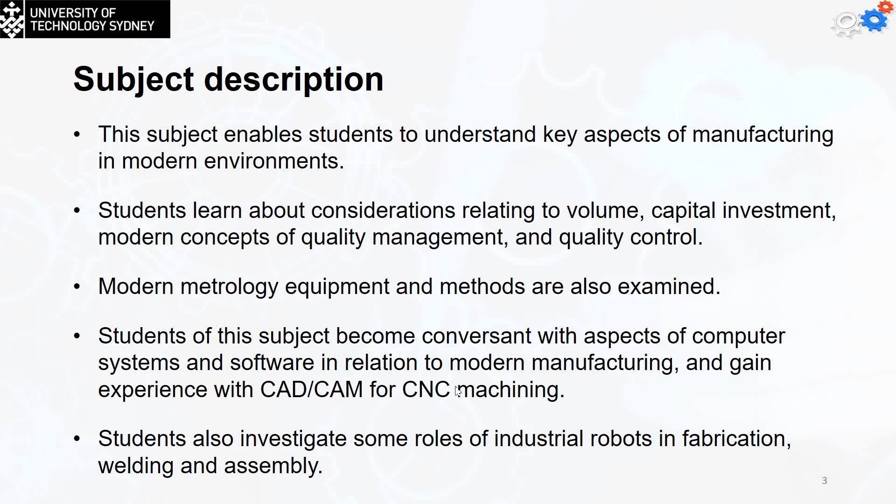So the plan for this subject this semester starts with week 0. Since it's an introduction session, we don't have any real class, and it starts on the 2nd of March. We started 2 days ago with an online introductory video covering production systems, automation in production systems, and automation principles and strategies.

Starting from week 1, we'll talk about CNC, which stands for numerical control, the numerical control process of machine tools, and computer-aided manufacturing systems, known as CAM. We'll also discuss open and closed loop control, and the sensors and actuators used in numerical control systems.

In week 2, we'll continue talking about CNC and CAM - computer numerical control and computer-aided manufacturing systems. We'll discuss ball screws, encoders, analysis of CNC positioning systems, and we'll learn about G-coding.

For G-coding, I'm going to send a separate video from the lecture where you'll learn the principles of G-coding and how to write G-code manually, because this will be part of your assessment number 1.

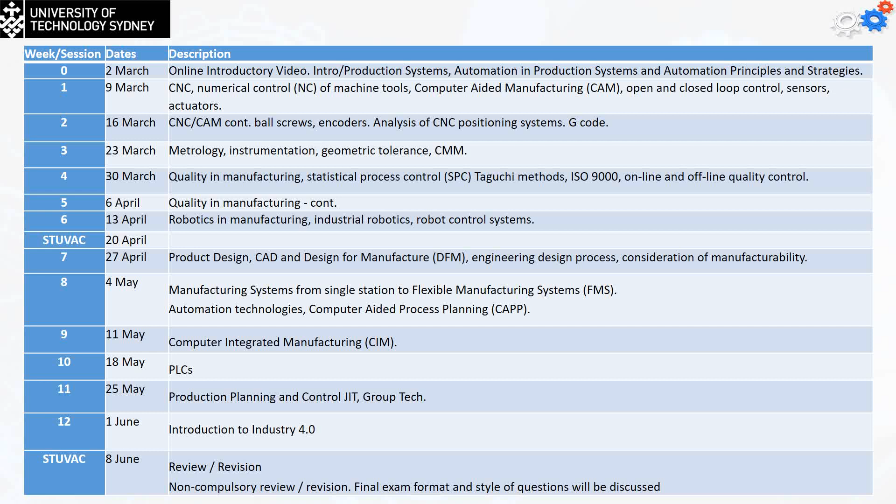On the STUVAC of the 8th of June, we'll have a review revision lecture, which will be non-compulsory attendance for students. But the revision will actually cover the final exam format and the style of questions we'll have. I can tell you that students who attend this revision lecture usually get very high marks in the final exam.

Now let's have an introduction about advanced manufacturing. It's something similar to the manufacturing we had, but we're going to talk about more advanced issues. I'm not going to cover advanced manufacturing processes, but I'm going to talk about advanced manufacturing styles and applications.

So you can see that we're going to cover things like management, how to make a model and then manufacture it. It's something more advanced than the manufacturing processes themselves - we're talking about the application rather than the technologies.

So the section we're going to cover for the day is going to be about the manufacturing production systems. Also, we're going to talk about the automation and production systems. We're going to cover the manual labor in the production system role, and we're going to talk about the automation principles and strategies.

So what is the definition of the production system? Simply a collection of people, equipment, and the procedure organized to accomplish the manufacturing operation of a company.

So we learned some previously, for example, about the casting. We talked about machining. We talked about additive manufacturing and other stuff. We talked about in the machining, the milling, the drilling, and so on.

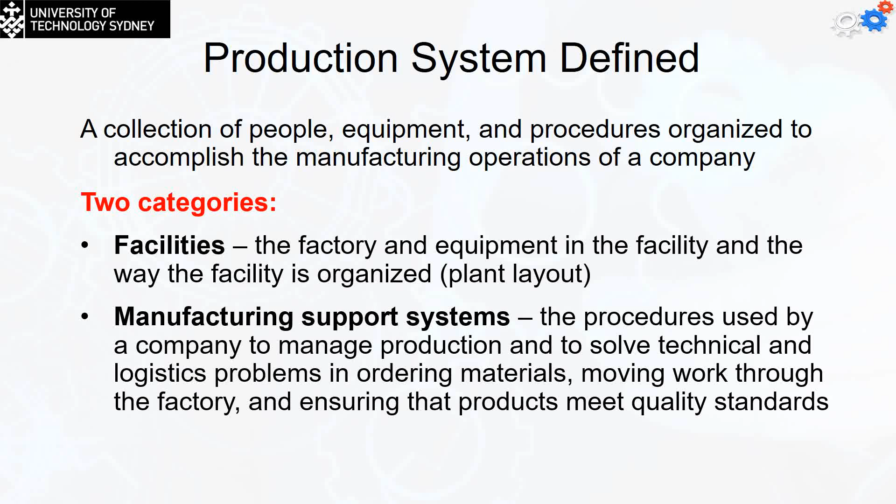So we can simply sketch that as a block diagram. As you can see here, the production system is going to be classified as facilities and manufacturing support system. The facilities is everything regarding the manufacturing system, and the factory and the plant layout. For the manufacturing support system, it's going to be the process of the product design, the manufacturing planning, the manufacturing control, and the business functions.

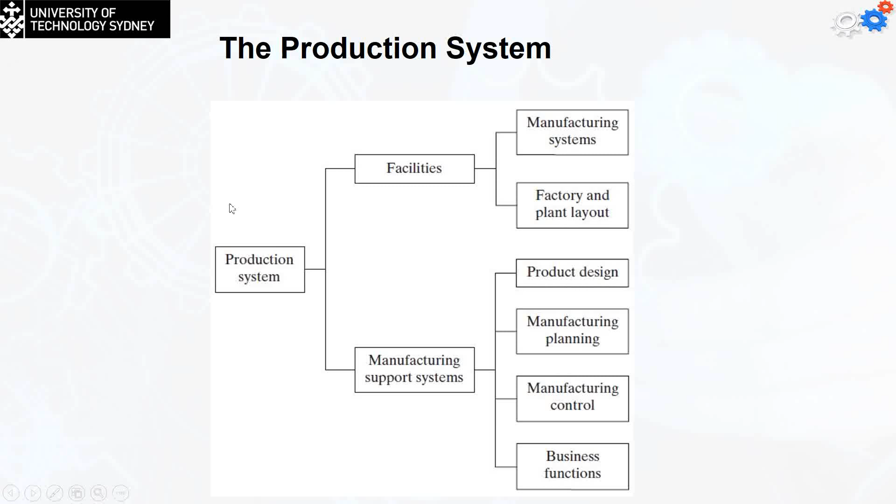The production system facilities are including the factory, the production machines, and the tooling. Of course, between the machines we need to have a material handling equipment. For the products, we are going to need an inspection equipment, and we need a computer system that controls the whole manufacturing operation.

The plant layout is the way that the equipment is going to be physically arranged in the factory. For example, we can make it as a full cell, where it's going to have the turning, milling, and drilling operations in the same cell, and the parts are going to move between these operations until we have the final part.

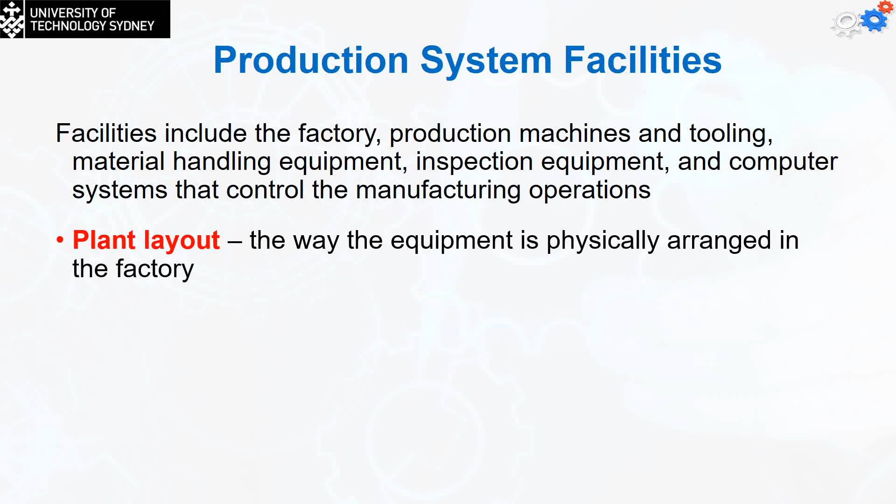Some places we are going to have it as a separate method, where instead of having a cell, we're going to have it in line, or we can have it as different departments, and the parts need to move between different departments until we finish the manufacturing process.

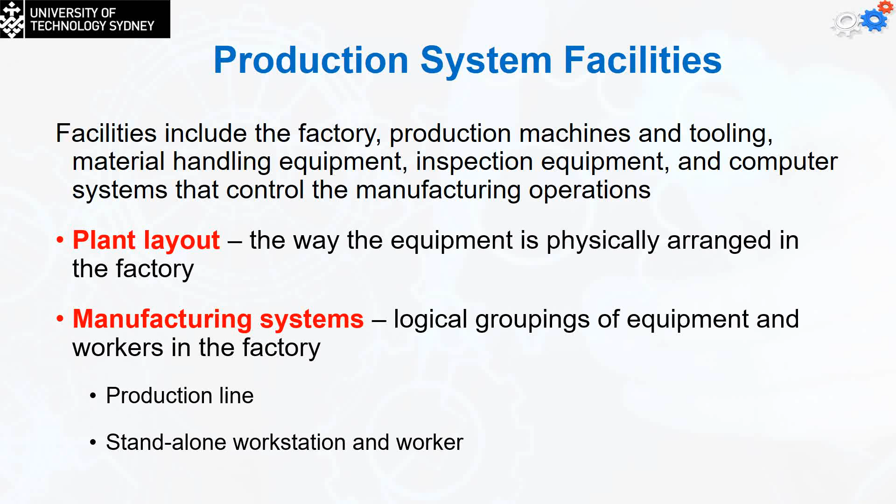The manufacturing system is a logical grouping of the equipments and the workers in the factory, which can be made as a production line or simply as standalone workstations and workers.

The manufacturing system has three categories in terms of the human participation in the process performed by the manufacturing systems. First is the manual work system, where we're going to have one worker who does all the work for one or more tasks without the aid of power tools, but sometimes he's going to use some hand tools. So just imagine there's a person working in an Apple factory who needs to assemble the mobile phone. Actually he doesn't have any power tools, but sometimes he's going to use hand tools like the screwdriver and other stuff.

The other type is going to be the worker and machine system, where the worker is going to be operating a powered equipment. It can be a drill, it can be a milling machine, or it can be a drilling machine, turning machine.

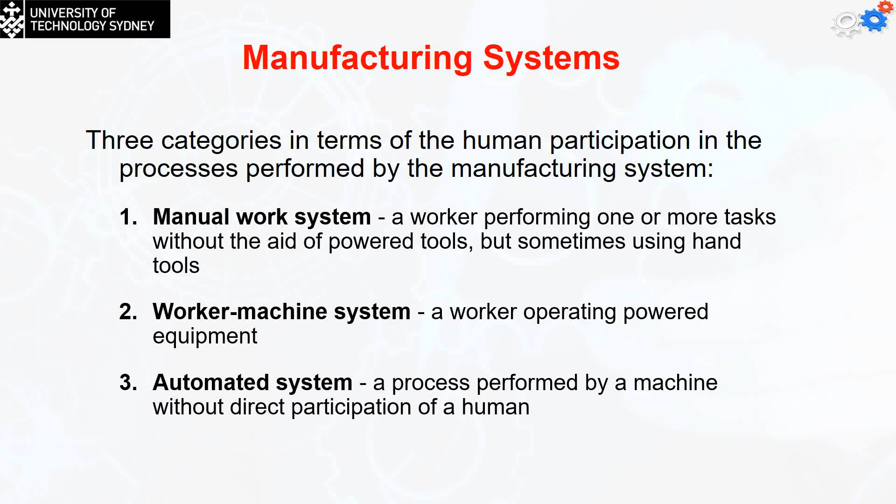The third manufacturing system we have is the automated system. The whole process is going to be performed by the machine without direct principal participation of the human, but we need a human to program this machine or to supervise the machine during the process. But he's not going to do the manufacturing process by hand like what we had in the worker and machine system.

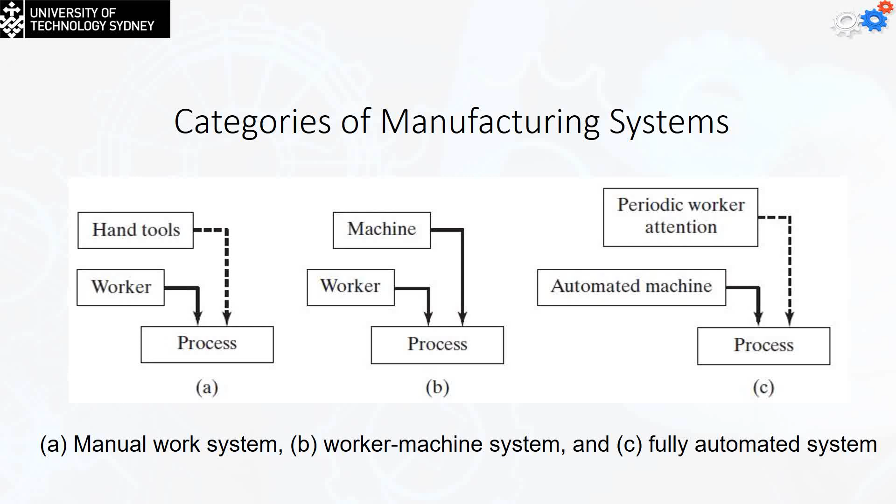The manufacturing support systems involve a sequence of activities consisting of four functions. The business function covers sales, marketing, order entry, cost accounting, and customer billing. This is what we call the white collar side.

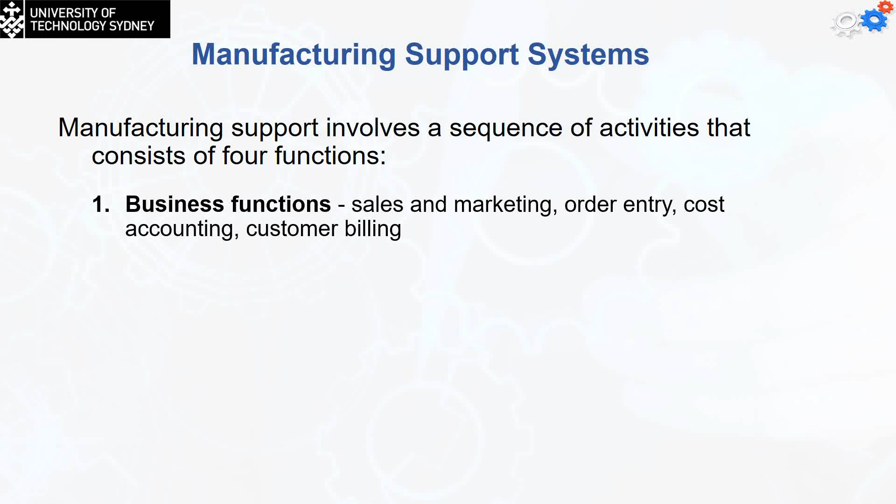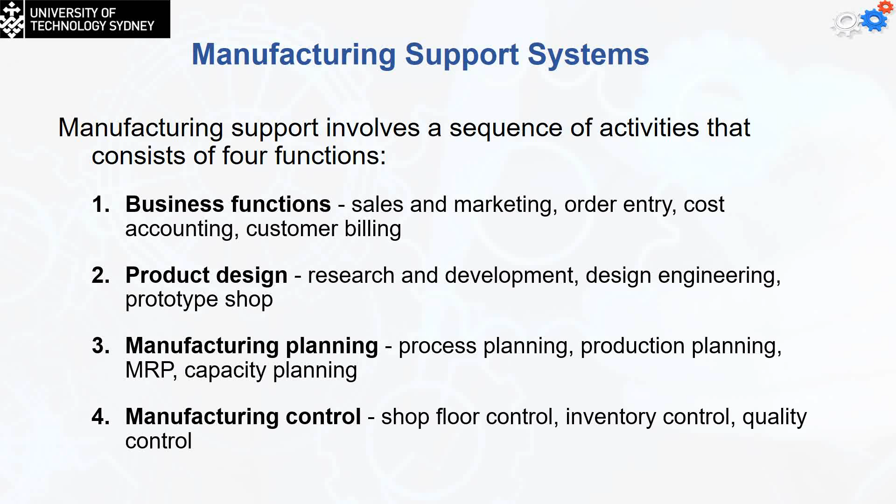Product design involves research and development, design engineering, and the prototype shop. Manufacturing planning is process planning, production planning, MRP, and capacity planning. Manufacturing control includes shop floor control, inventory control, and quality control.

Product design works within the budget of the vendors and the client, and then we start the manufacturing planning process. We send the data to the manufacturing control system, and this is sent to factory operations, along with the starting material which has been ordered by the business function before we start the manufacturing process.

Why does manufacturing control always have feedback from factory operations? That's because we need continuous quality control for the produced part and to align the process to match the designed product. Then we produce the products for the customer.

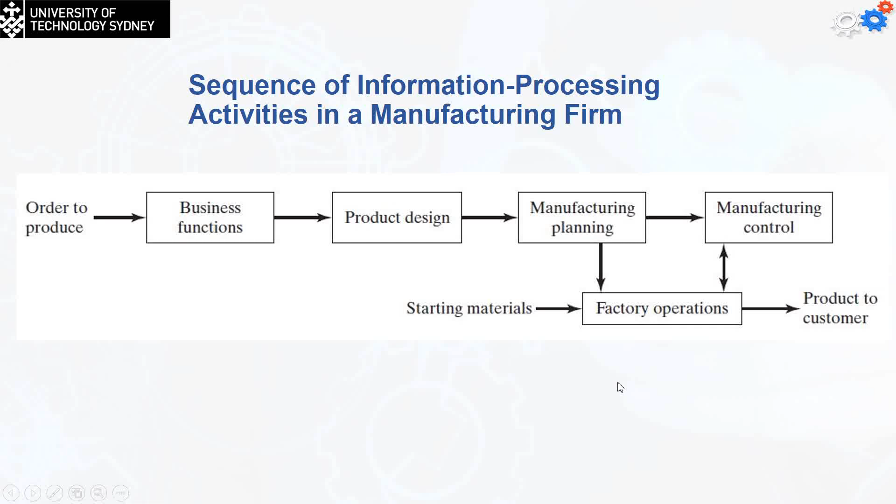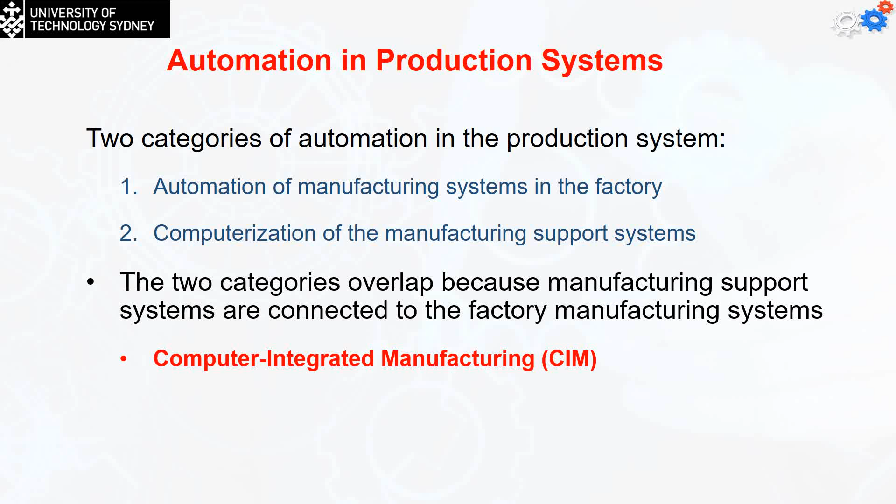Now, what is the role of automation in production systems? We have two categories of automation in production systems: first, the automation of manufacturing systems in the factory, and second, the computerization of manufacturing support systems. These two categories usually overlap, because the manufacturing support systems are connected to the factory manufacturing systems, and this overlap is controlled by something called Computer Integrated Manufacturing, or CIM.

So the production system, once again, is extended to have automation which can control the facilities and manufacturing support systems through CIM techniques. Automation plays a role in controlling manufacturing systems, while computerization handles all the other aspects like the factory and plant layout, product design, manufacturing planning, manufacturing control, and the business function.

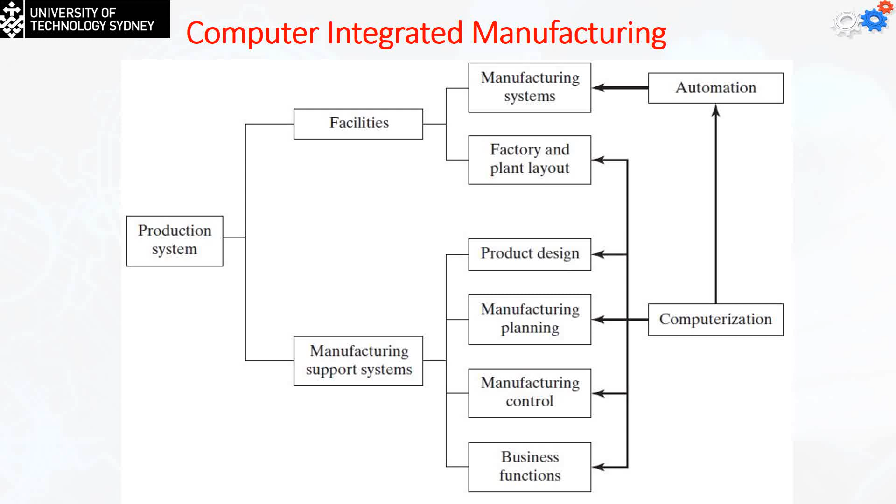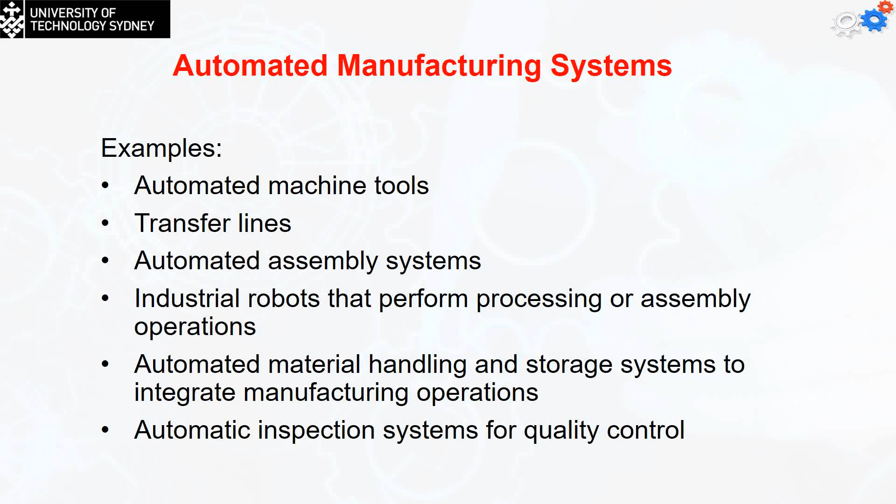Some examples of automated manufacturing systems are automated machine tools, transfer lines, automated assembly systems, and industrial robots that perform processing or assembly operations, as well as automated material handling and storage systems to integrate manufacturing operations. Lastly, we have automatic inspection systems for quality control.

Automated manufacturing systems have three basic types: fixed automation, programmable automation, and flexible automation. An example of fixed automation is a machine limited to making a certain type of product - it's almost fixed, and it's very hard to change the product type made on this process.

If we have a CNC machine, we can reprogram the product continuously - that's programmable automation. Flexible automation is more advanced, where we can simply change the product type being manufactured without needing setup time. This is achieved with more advanced computers containing multiple programs, allowing us to work alternately on different products without making a new setup - we can simply change the product type by changing the program only.

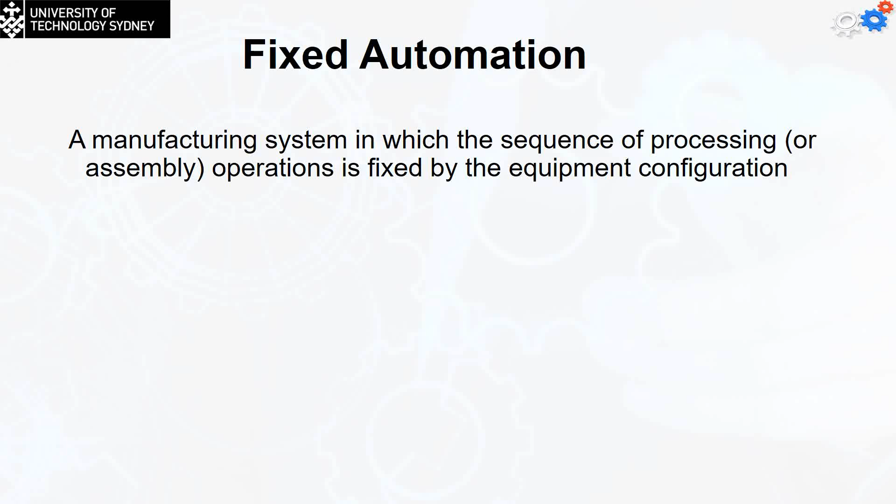Fixed automation is a manufacturing system in which the sequence of the processing or assembly operations is fixed by the equipment configuration. Typical features: it's suited for high production quantities, it has high initial investment for custom engineering equipment, it can have high production rates, and it's relatively inflexible in accommodating product variety.

So let's think about an example. I think I have an example on the other side... no, I don't have this one now. So actually, an example for the fixed automation system, just imagine that you have a machine.

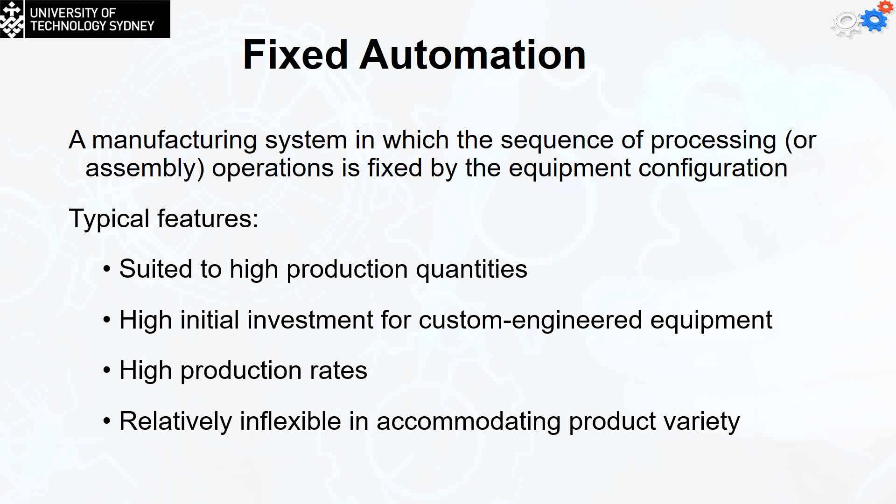Let's say it's plastic injection molding. The mold itself, we're spending something about $100,000 to make, and this mold cannot simply change the type of product it makes. The plastic melting machine itself can make multiple products, but this depends on the mold we add in the beginning. So we're investing a high cost on the mold, but it can only make one product. We cannot change the type of product we're going to make.

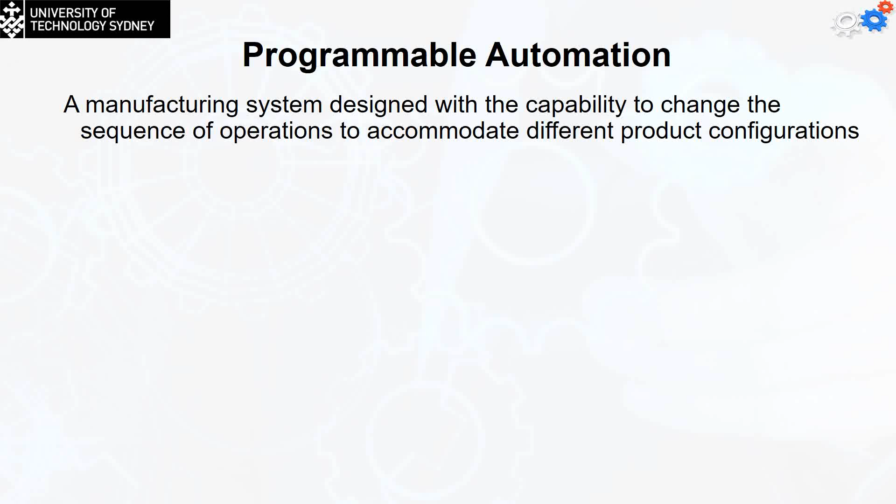Now, for programmable automation, it's a manufacturing system designed with the capability to change the sequence of operations to accommodate different product configurations.

The typical features for that: once again, high investment in general purpose equipment, simply because the technology is costly. Because we need to do the changing in products or the programming, this will have a lower production rate than fixed automation. The flexibility to deal with variation and change of production configuration is available.

It's most suitable for batch production. Batch production means you stop the whole factory, work for the whole week producing product number 1, then for the next week make a new setup and manufacture the next, let's say, 10,000 pieces for the next batch or product, and so on. The problem is the physical setup and the part programming must be changed between the jobs or batches.

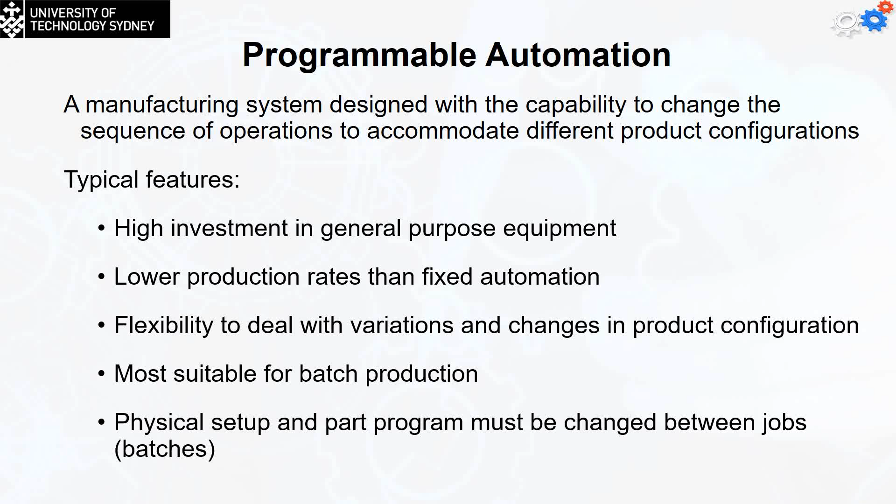Now, flexible automation is a mix between both. It's an extension of programmable automation in which the system is capable of changing over from one job to the next, but without losing any time between jobs. That means the fixture mainly is going to be mixed between the different products.

The typical features in this case: high investment for custom engineering systems, and continuous production of variable mixes of products. Now, just imagine what we mean by continuous production of variable mixes of products.

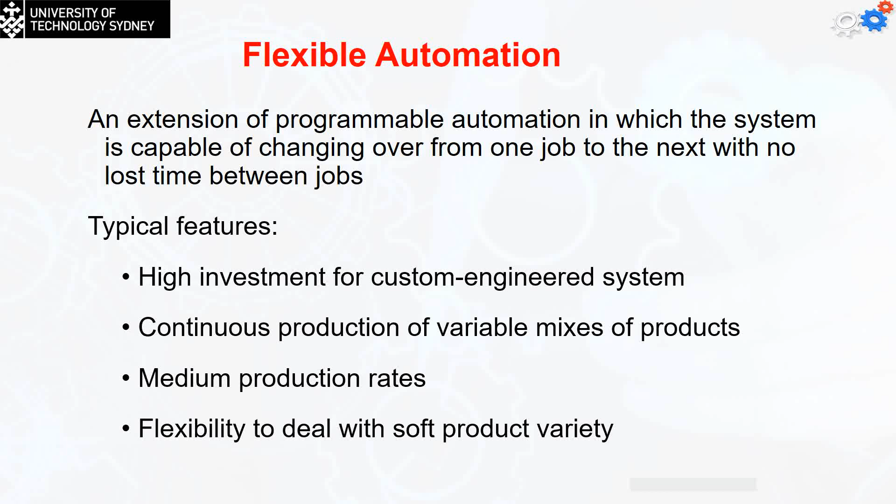So as a sketch, we can see that product variety increases with programmable automation, and production quantity is reduced with flexible automation, while in fixed automation we have the minimum production variety, because it's fixed to the initial investment of the mold we made, for example.

But because programmable automation has a waiting time when we change the program and the fixtures, it has lower production quantity, while flexible automation is in between, because there's no waiting time for changing fixtures, and the changing of the program takes only a matter of minutes. So it stands in the middle.

But for fixed automation, it's going to be in the range of more than 12,000 to 1.5 million - a massive production rate. Just imagine again the example of plastic injection molding: each time we fill the mold we can have 20 to 25 or even 50 parts manufactured within about 60 seconds.

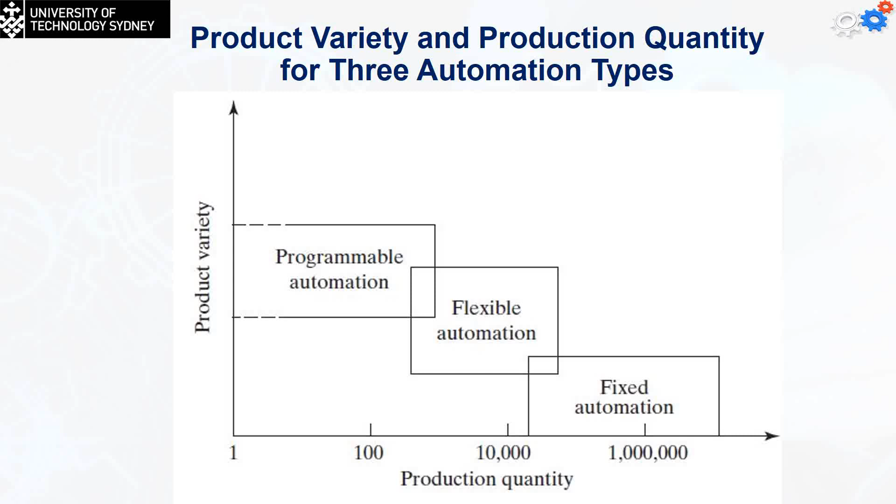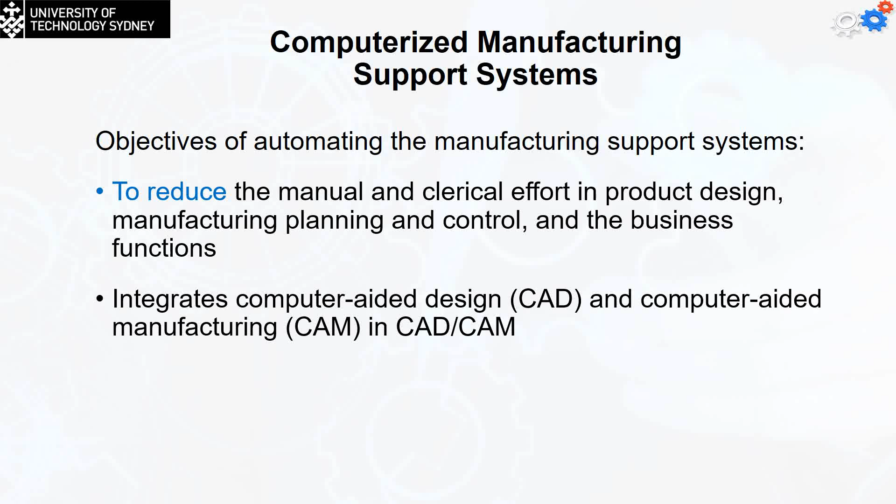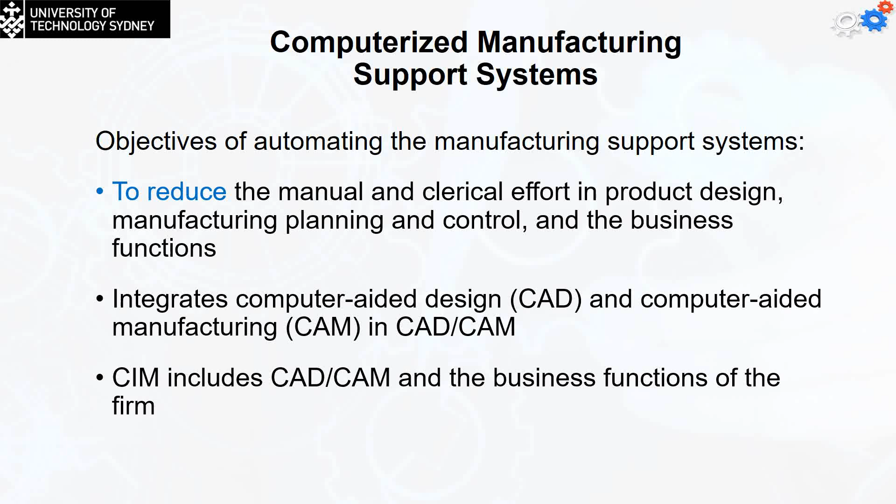For the computerized manufacturing support systems, the objectives of automating manufacturing support systems are: first, we need to reduce manual and clerical efforts in product design, reduce manufacturing planning and control, and reduce business functions. It will also integrate computer-aided design and computer-aided manufacturing, known as CAD/CAM. CIM will include both CAD/CAM and the business functions in the firm. So CIM, computer integrated manufacturing, mixes all manufacturing design and manufacturing with business functions in one big system. Now, why do we need automating?

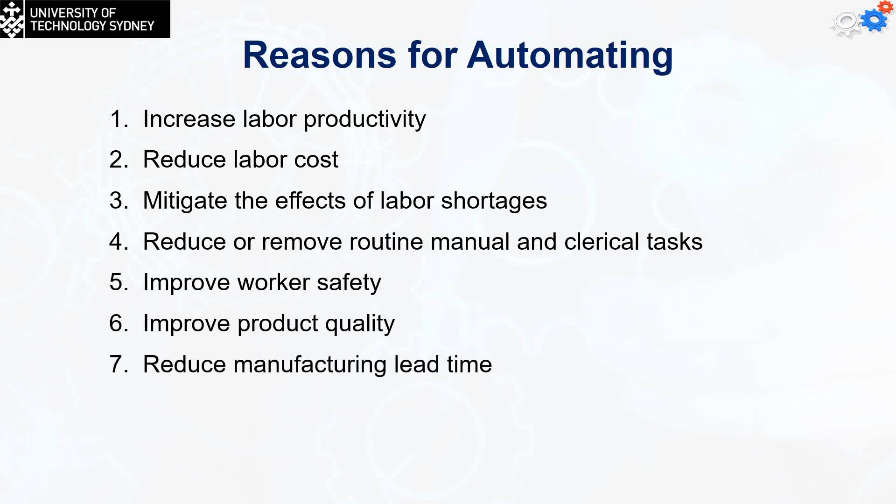First, we are going to increase labor productivity. Second, we are going to reduce labor cost. We are going to mitigate the effects of labor shortages. We are going to reduce or remove routine manual and clerical tasks. We are going to improve worker safety. We are going to improve product quality. We are going to reduce manufacturing lead time, accomplish what cannot be done manually, and avoid the high cost of not automating.

And we need to ask ourselves now, what will be the role of manual labor in the production system? Because we don't want full automated manufacturing that makes manual labor simply disappear. So first we need to understand the role of manual labor in the production system. Is there any place for manual labor in the modern production system? The answer is yes.

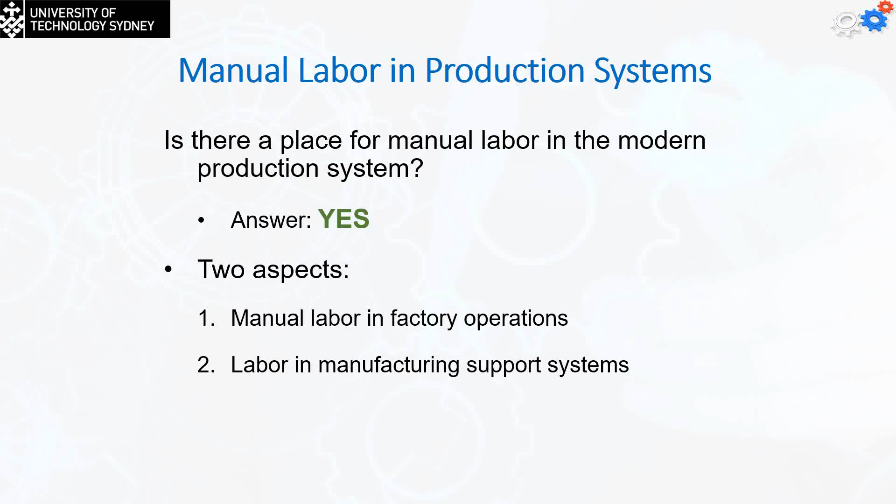So we are going to have two aspects for manual labor in advanced manufacturing systems: manual labor in factory operations, and manual labor in manufacturing support systems. So what will be the role of manual labor in factory operations? Usually, long term, the trend is toward greater use of automated manufacturing systems to substitute for manual labor.

So when is manual labor justified? Some countries have very low labor rates, and automation cannot be justified. Now you're thinking about that, right? Yep. So when we talk about most third world countries, for example, manufacturing of the clothes we're wearing or other stuff is usually transferred to these countries. I don't want to mention any names of countries, but that's what happens because of the low rates of manual labor.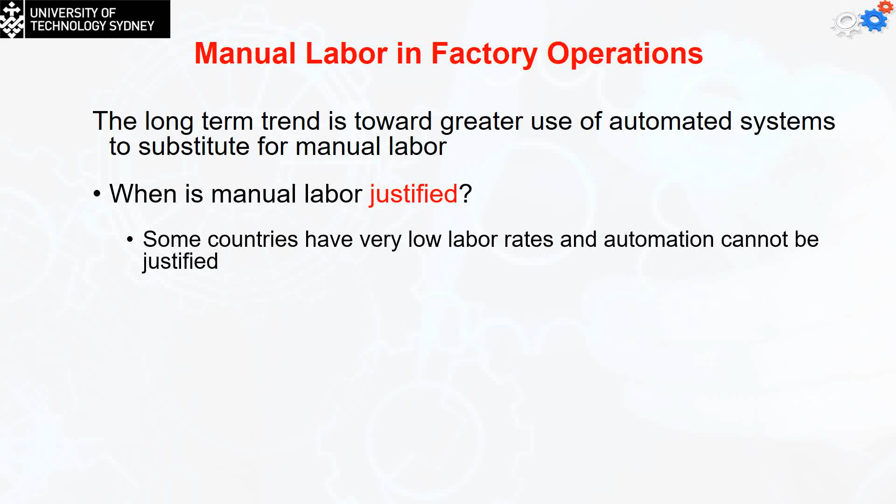So it's justified to use manual labor instead of machines for these manufacturing processes. Also, a task may be too technologically difficult to automate. Now, you may imagine that until today, most of the mobile phone assembly processes, or at least 80% of them, are done by manual labor, because when dealing with very small critical parts, it's very hard and difficult to automate the process.

Also, if we have a short product life cycle, I don't want to invest in a simple manufacturing system, for example. We're talking about the tractor assembly process. We're not going to manufacture millions of tractors; it's going to be in the range of less than 5,000, for example. So I don't have to heavily invest in equipment to automate the assembly process of tractors. The manual labor can simply do the job.

Also, for some customized products that require human flexibility, like handmade things—watches or very high-end luxury cars—which are assembled by humans, some parts need human skills to do the work.

Also, to cope with ups and downs in demand: if I have manual labor, that doesn't mean I have to stop my machines from working when I don't have demand. I'm going to have labor, and they're going to justify their payments while they do the work, and they're going to be on vacation when there's no demand for work.

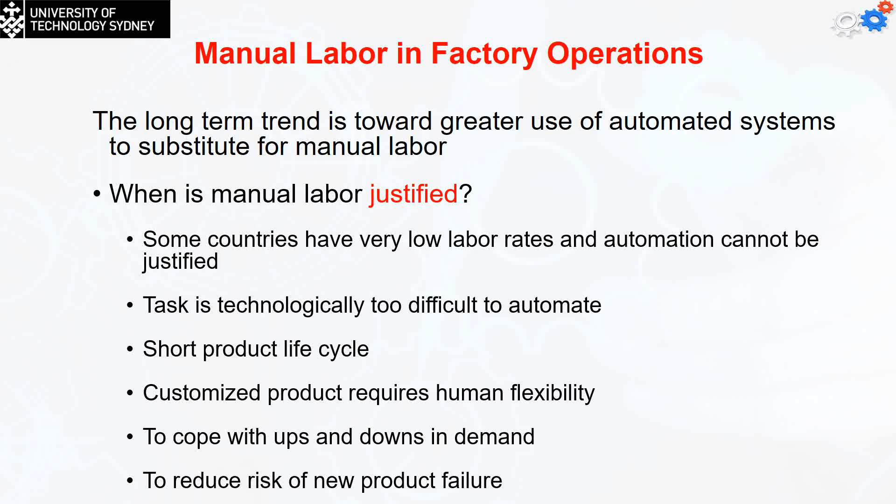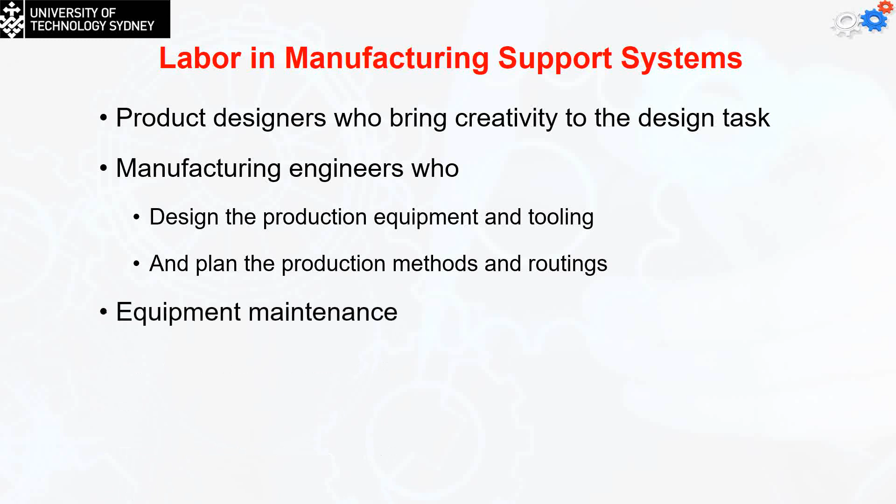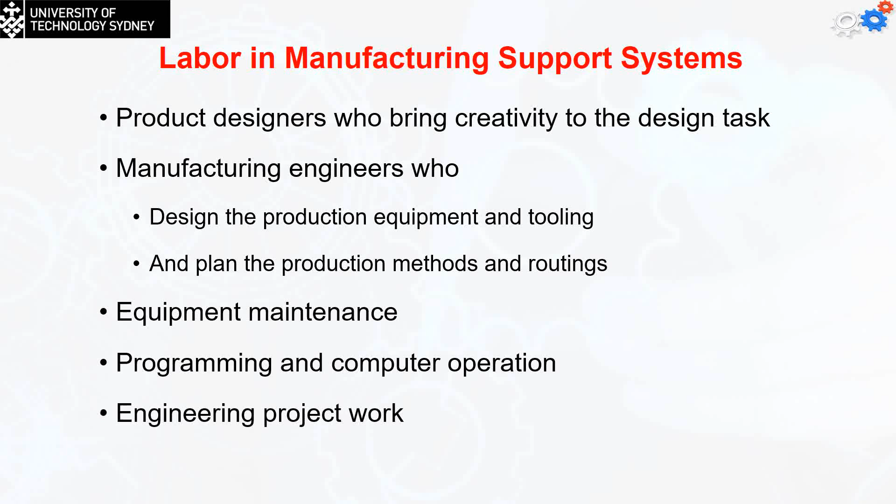What is the role of labor in manufacturing support systems? The product designers who bring creativity to design tasks are human. The manufacturing engineers design the production equipment and tooling, and plan the production methods and routing. Equipment maintenance is always done by labor, and programming and computer operation are always performed by human labor, along with engineering project work and the plant management process.

The principles and strategies we have for automation are what we call the USA principle, the 10 strategies for automation and process improvements, and the automation migration strategy.

What is the USA principle? First, understand the existing processes, such as input-output analysis, value chain analysis, charting techniques, and mathematical modeling.

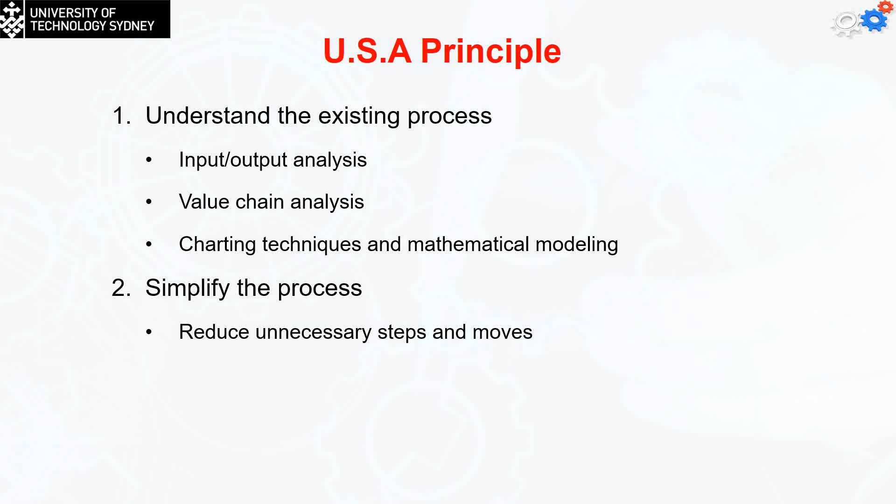Second, simplify the process as much as possible, meaning we reduce unnecessary steps and moves. Third, automate the process, using the 10 strategies for automation and production systems, or using the automation migration strategy.

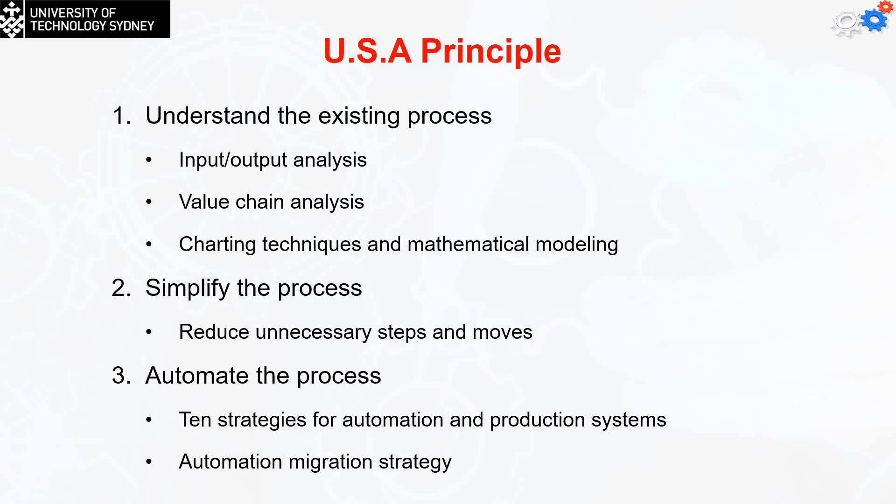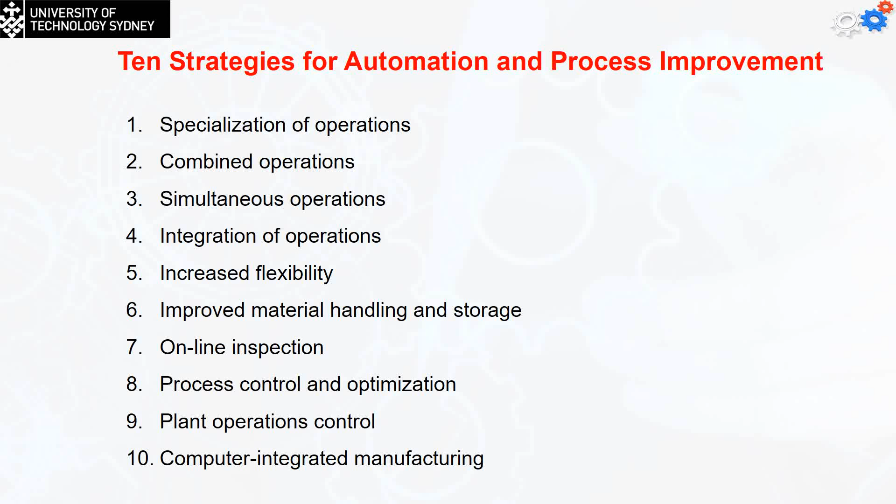What are the 10 strategies for automation and process improvements? First, specialization of operations. Combine operations together. Make operations simultaneous. Integrate operations, increase flexibility, improve material handling and storage. Use online inspection, process control and optimization, plant operations control, and finally use computer integrated manufacturing as much as we can.

The automation migration strategy for introducing new products: Phase 1 is manual production, using single station manned cells working independently, with the advantage of quick setup and low tooling cost. Phase 2 is automated production, where we have a single station automated cell operating independently, as demand grows and automation can be justified.

Phase 3 is automated integrated production. If demand grows and we have good success with the product, we can move to a multi-station system with a series of operations and automated transfer of the work unit between stations.

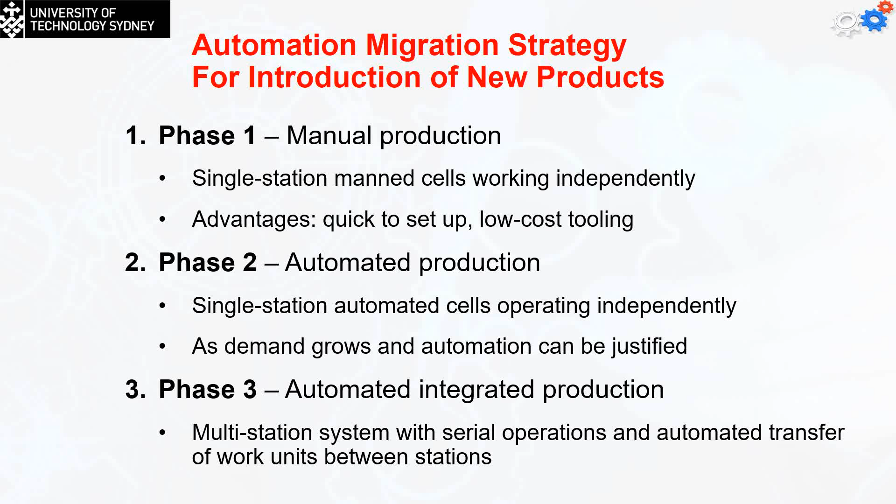So this is the automation migration strategy. Phase 1, shown at the top, is simply manual workstations, and even the material handling is manual handling.

If product demand increases further, we jump to stage 3, cutting the time wasted during manufacturing in phase 2 due to manual handling, by using automated transfer of the work unit or an automated material handling system.

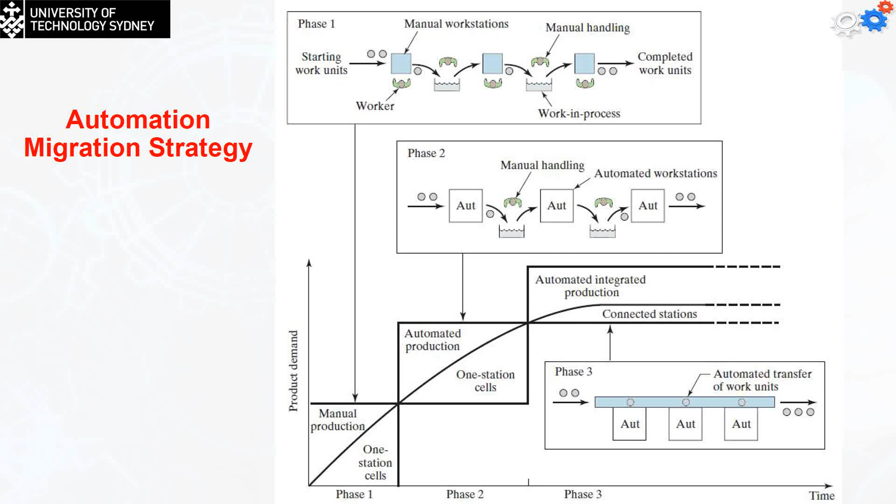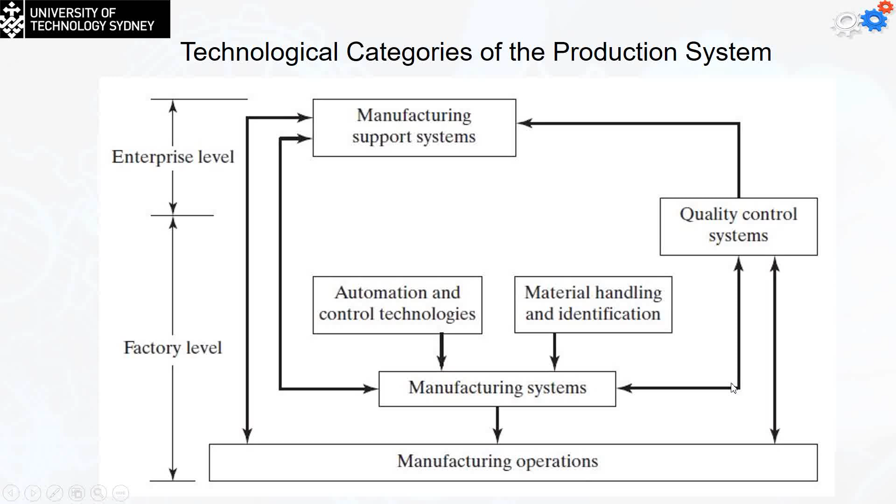At the factory level, we have the manufacturing systems, which get data from the automation and control technologies, and the material handling and identification process. This simply controls the manufacturing operations toward getting the final products. You can see the arrows showing which part provides feedback and which part sends data for the operation process.